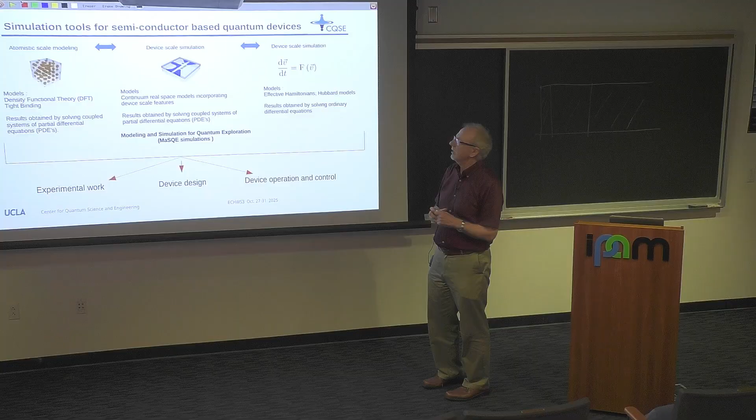And what do I mean by simulation tools? Well, I'm showing a picture which is just like everybody else's picture. You've got atoms and device scales, and then we also have device scale simulation, which actually means ODEs and things. So in these devices, there's certainly atomistic scale modeling that's needed because they're made out of semiconductors. There's device scale modeling, so what happens when you put on gates and how things work.

And then, of course, that's too complicated—if they actually want to make a device with hundreds of thousands of gates, you have to develop sort of an ODE model, basically a circuit model, which then allows people to think about control dynamics and error correction and all that kind of stuff you need to do to make a quantum device work.

Now, we don't do all of that—we only do the stuff in the middle. But we do have projects where we collaborate with people doing atomistic scale modeling to answer questions that come up when that type of modeling is needed for what goes on in the device. Similarly, we work with people who work with these effective models; we help them parameterize them based on physical quantities.

Okay, so what does a silicon quantum dot device look like? Well, basically, let me use the pointer. Turn it on. Whoa. There. That was the erase button.

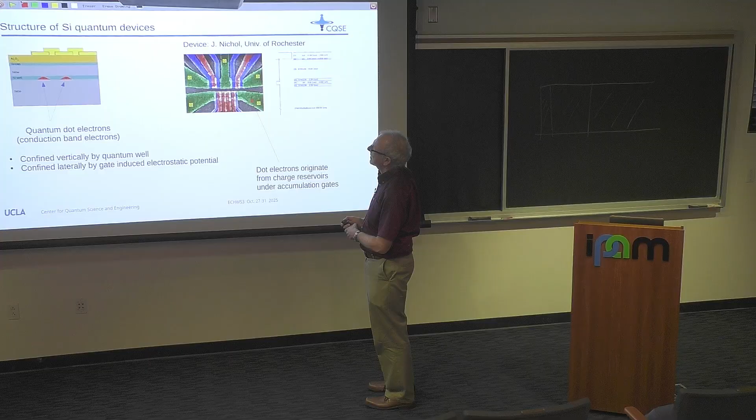Here we go. We've got a layered semiconductor material—oxide on top, some silicon oxide, a bunch of stuff, a buffer layer, and then this green bar here is strained silicon. Because it's strained, it has a particular crystal structure, and the electrons like to be there, which means it has a band shift. And down here's another buffer.

So the idea is you have this vertical structure, and there's electrons. The electrons have an affinity to be within a quantum well that's defined by this strained silicon layer. They're confined vertically, and then confined laterally by imposing potentials using gates on the surface.

So this is what a gated surface looks like. Where do the electrons come from that are going to be isolated underneath the gates to make quantum dots? They come from these reservoirs on the side, and these yellow boxes are ohmic contacts. You pump electrons in here, and they're able to flow across and occupy distinct locations in the device. Here's what the structure of the device looks like, here's the quantum well, and this is where they sit down from the top.

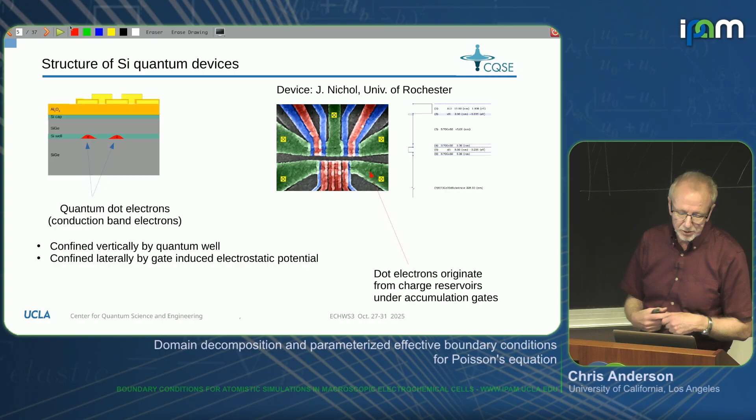So this is basically the quantum device, and the game that's played, at least that I need to play, is how do you place the gates? What kind of materials, where do you place the layers, in such a way that you can actually capture isolated electrons inside the device? And moreover, can you modulate the gate biases to introduce certain types of electronic interaction between those isolated dots so that you could get a hold of a subspace of electronic states, electronic structure states, so that you could store quantum information and do quantum operations.

What are the simulation models that are used? We're using the N-particle Schrödinger's equation, but using the effective mass approximation. So this is a continuous approach - there's no resolving of atomic features. I should call it implicit metal, I guess, which means it's metal with a dielectric constant.

These things are very cold, so they're operated at a few millikelvin. So basically things are frozen in.

What does this mean for the electronic structure calculations to do? Because we're using the envelope function, it doesn't resolve the atomic scale fluctuations - it's basically the envelope of them. Typical sizes, if you have gates about 40 nanometers, a single electron wave function's maximal size is about 40 nanometers, typically a lot less, 10 to 20 nanometers. But of course, atomic spacing is about half a nanometer. So we're solving Schrödinger's equation, but we're not resolving the atomic scale features.

Here's just a picture of lots of dots, and here's the charge density. These are the electrons that have been trapped. There's more electrons down here. This forms what are called sensing dots. Okay, so that's the simulation model.

And just to say that there's some reality behind this - there's a code called MaSQE MDMM, which is our core simulation code. MDMM stands for multi-domain, multi-models. And we use domain decomposition quite heavily, not only in the vertical direction, as I'll talk about, but also in the lateral direction.

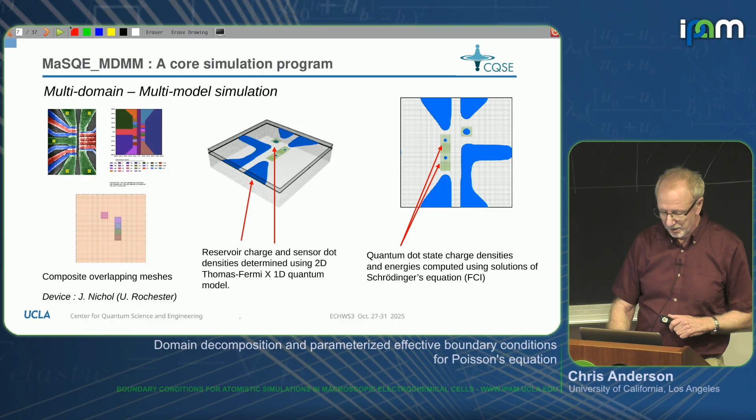Okay, so now I'm going to leave this - this is sort of the context where we're doing things. I want to get along to what's related to what's going on here. So what is the computational workflow? Well, it's what you'd expect.

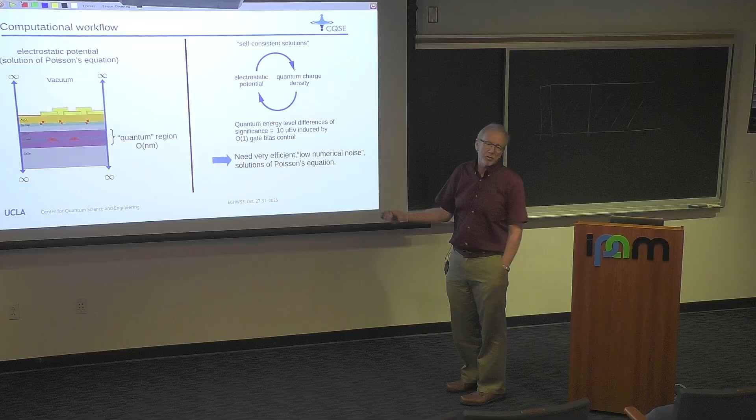You have an electrostatic potential in the device, and you have to compute it. You have the quantum region, and then you solve Schrödinger's equation. You figure out what the charge is, and then you repeat, so you just create self-consistent solutions. This is the typical self-consistent Schrödinger-Poisson calculation, although we're introducing different models for the way we actually do the population.

We actually use full FCI in the dots, and then this other Thomas-Fermi type approach for the outside. One of the challenges of this task is that the energy level differences of significance are about 10 microeV. That's because we're very cold, and we're interested in the difference between ground and excited states of these things, and they're very close together. So it's not 1 kcal per mole, it's a lot less. It's 10 microeV by order of 1 gate bias.

So the idea is you want to wiggle these things a little bit and cause the exchange energy between the dots to change. So what's needed here in terms of just the potential calculation is something that's very efficient, and in particular, low numerical noise. This is very important, because any sort of noise that's introduced by an iterative process or whatever contaminates the energy level things that you're trying to observe.

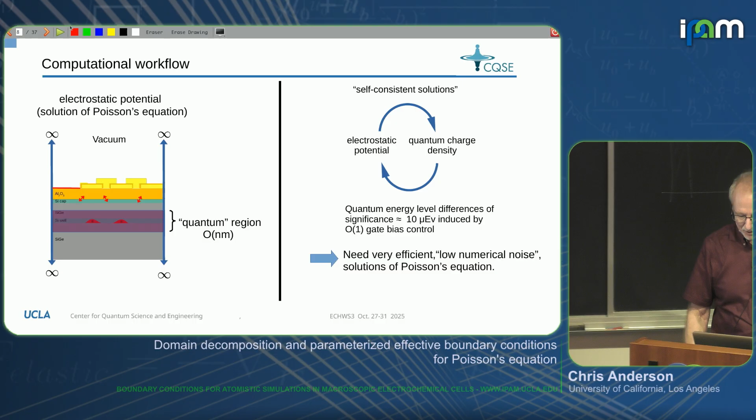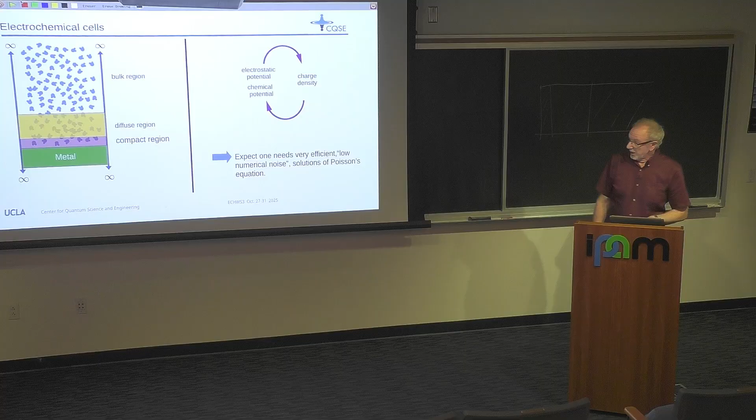And what do you have? How do you do the simulation? Well, you have to do electrostatics, chemical potentials. There's an additional wrinkle - you have much more complicated physics, at least to me. And then you get charge density, and there is this overall self-consistency loop between the things. Very simplified, but it does point out that you do need electrostatic potentials. It's part of the component. So in some sense, domain decomposition, you want to do different things, and somehow it should apply.

So what is the challenge with the kind of devices that we work on? Well, that particular code I mentioned, MaSQE MDMM, is optimized for applying gate biases just on a planar surface, because that's simple. And if you don't really care about gate structure, just what is the potential they induce, that's fine. Moreover, it reduces to doing calculations in a box, and you can do calculations in a box very fast with fast Fourier transforms. So we have a very fast solver for that.

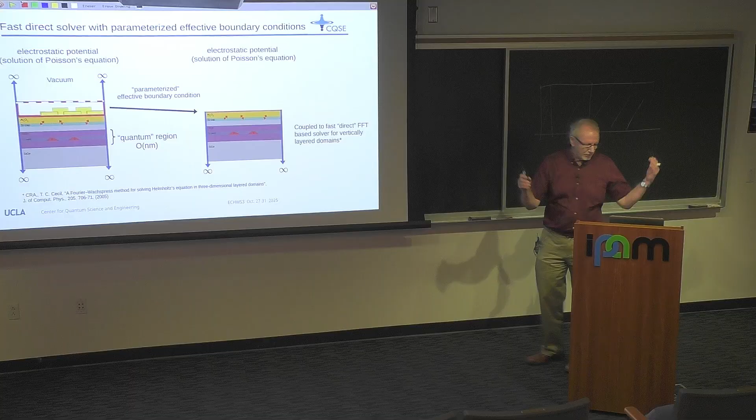Trouble is, people come along and say, well, actually, now we want to understand what the effect of those gates is. That's a problem, because first of all, when you start doing three-dimensional gate geometry with bizarre dielectric coefficients or who knows what, you then are talking about finite element solutions in 3D, and it just takes a while to solve 3D electrostatics problems with complicated geometry.

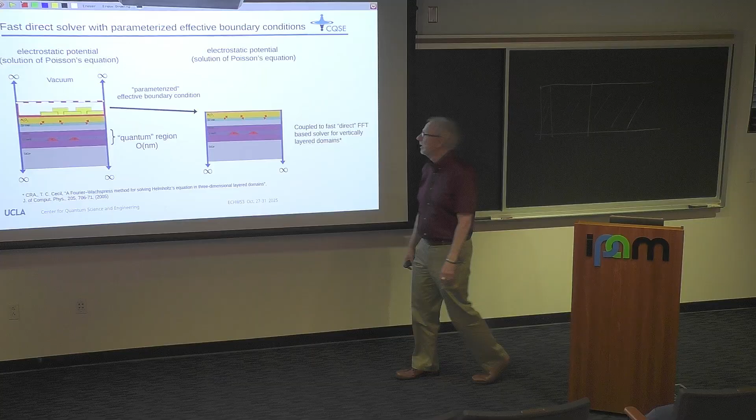So the concept is what you would like is to replace that whole complicated region by a planar surface, some sort of boundary condition, which you can then just couple to the fast Poisson solver that goes on down here. Now, it has to be parameterized because whatever you put there, there's a dependency of the solution down here on the gate biases. That's why they work. So somehow you have to incorporate into your interface boundary condition, parametrically, what the gate biases are.

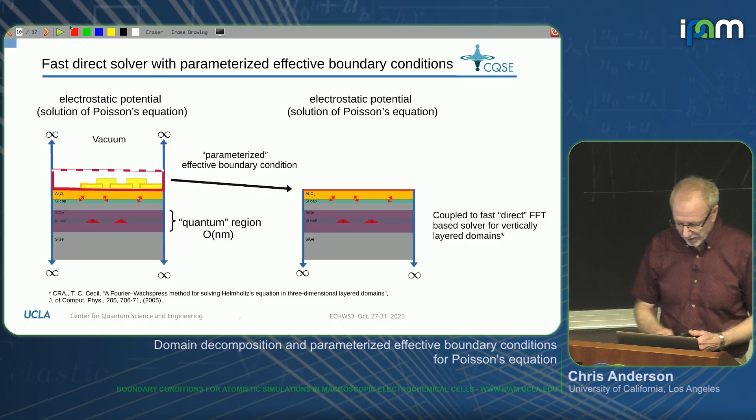So now what I want to delve into is how do you derive that boundary condition? Okay, so here's the story. You have two regions, and you want to do some work and come up with parameterized effective boundary conditions. So the way I'm going to do it is go through the lens of domain decomposition, sort of the classical stuff. So now I'm going to do a little background in domain decomposition for Poisson's equation.

If you went to a talk that a numerical analyst gave about domain decomposition, they basically show you this sequence of pictures, at least in the beginning. First of all, they'd explain what is the idea behind domain decomposition? Well, let's think about Poisson's equation. I've got a region, and I break it up into two pieces, and I have a solver for each region. I can solve it, say, quickly in each region for whatever reason. And the game is, how can I use solvers in each of these regions, combine them to get the solver of the whole domain? That's the question that domain decomposition, from a numerical viewpoint, answers.

Okay, so there's an observation that's made, and it's pretty straightforward, which is that if you happen to know the solution on the interface, then you're done, because for Poisson's equation, it's completely determined by the right-hand side and the boundary values. So if I know the values here along the red, given those values, I can solve it in A and solve it in B, and if these are the true solution values, then they will match up, and I will get the solution over the whole domain. Right.

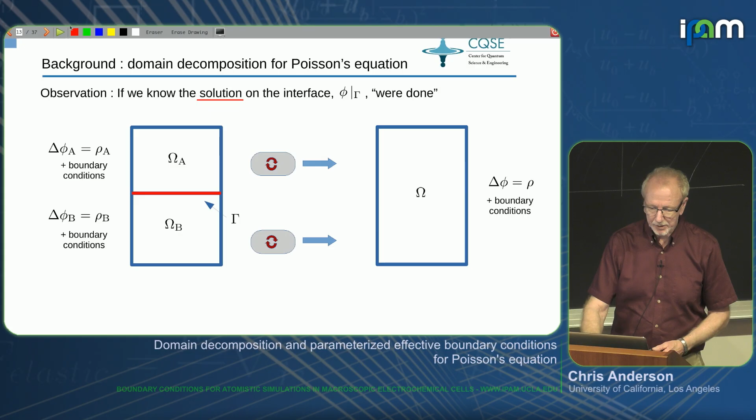Okay, so what's classic domain decomposition? I alluded to this historical way that people have been using this technique, and they've used it on Poisson's equation. In fact, it was started by Schwarz in 1870, nice paper in German, talking about how to do this process. It's kind of amazing. But if you go out on the web, you'll see that they all have this pattern: I have these two solvers. How do I combine the solution?

They say, well, do something in A for a while, and then evaluate the boundary values, and then solve it in B for a while, and then get the boundary values, and then do A. So there's this iterative process where you're consecutively applying one and then the other operator. And ideally in the limit, when you do this alternating thing, that's why it's called alternating, you end up with the values on the interface, and then you can fill in both sides.

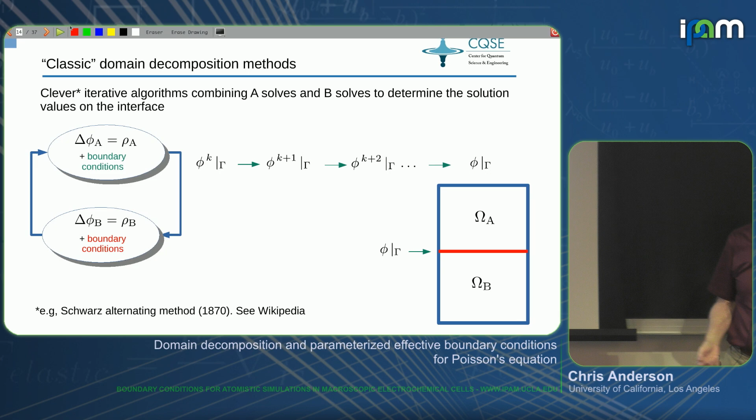And this is an interesting idea, so math people got a hold of it, and linear algebra people got a hold of it, and what have they been thinking about? Well, first of all, what governs the convergence of this process? Or given that it is convergent, how could you accelerate it? Once you have a technique, how do you make it go faster? How do you prove it works? It doesn't always work. You have to choose different things.

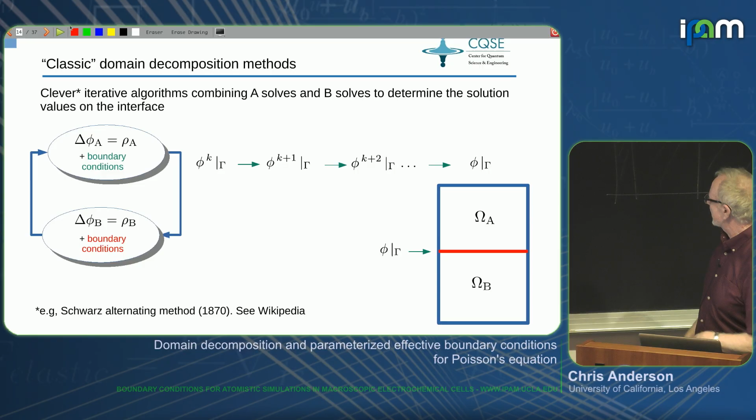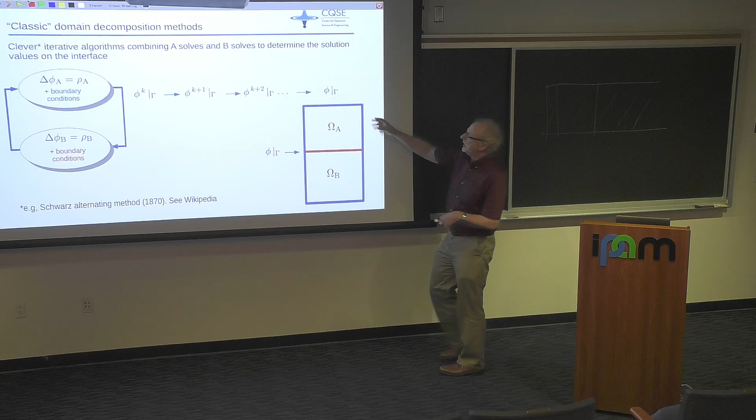Here I've had a simple case with two blocks, but what happens if I break up the domain into 64 8x8 blocks? How do you make all that work? So you'll see these kind of papers. Now the thing is, that doesn't really help us, because the whole idea is that you don't want to have to solve them over and over again. That gets too expensive. So this self-consistency that you use in classical domain decomposition doesn't work for us.

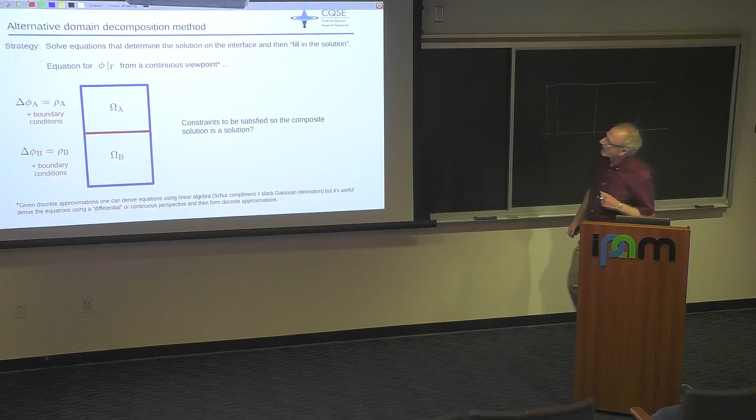So there's another way to do it, which has already been discovered, but from a PDE viewpoint. The idea is that if the solution on the interface determines the solution, fine, just write an equation for the interfacial values and then solve it. So do that first, and then solve on either side. So to get started here, you have to have an equation. So how do you get the equation?

I'm going to talk about obtaining the equation through a quote-unquote derivation from a continuous viewpoint, and this is important so we can use analytical models if we want. But there is a way to derive equations for interfacial values between these two regions from a linear algebra viewpoint. If you have a complete discretization over the whole domain, and you isolate the unknowns along the interface and structure your matrix appropriately, you can find equations for the interface that you solve first, and then you solve the equations on either side. That set of equations is known as the Schur complement.

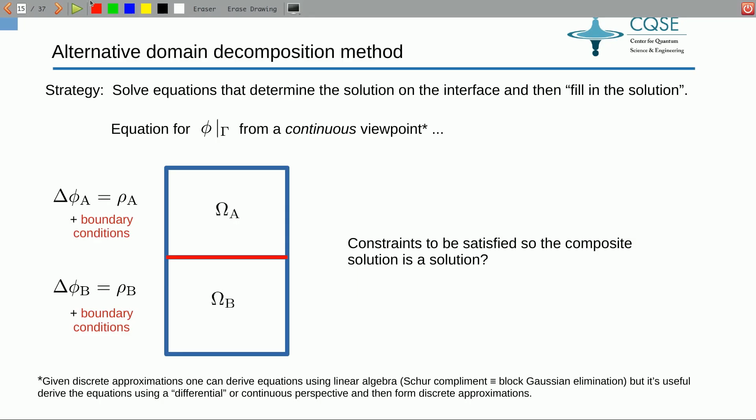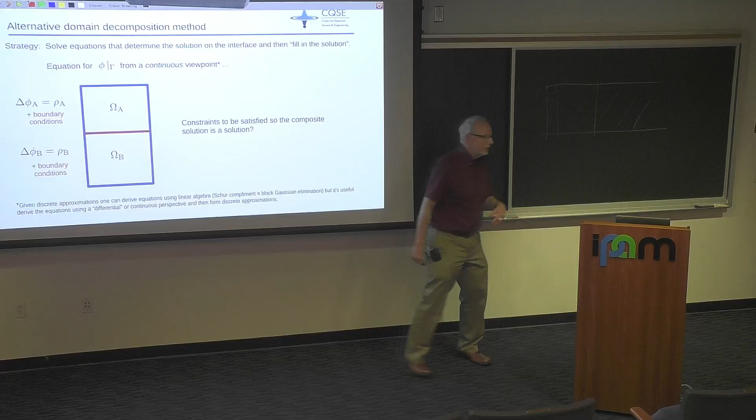Now, you don't even have to be fancy linear algebra. Usually when I teach it, I just say, you're just doing block Gaussian elimination. Gaussian elimination says, do something to get down to the corner, and then you work your way backwards. So this is block Gaussian elimination, but instead of numbers, you're using matrices. Same idea works. So if you have a discretization, you can write down the equation for this first and then combine them. Now, this isn't too useful for us because we don't want to start with a discretization. We want to start with just a generic model. So when you're deriving equations, you say, well, what has to be satisfied?

So physically, what has to be satisfied is you need continuity across the interface. You need that whatever you put here, you're going to use the same value when you're solving this as when you're solving that equation. So that's continuity across the interface. And then the other thing, this nice thing about elliptic problems, is that it's sufficient to get a whole solution to also just include that you have continuity of the normal derivatives.

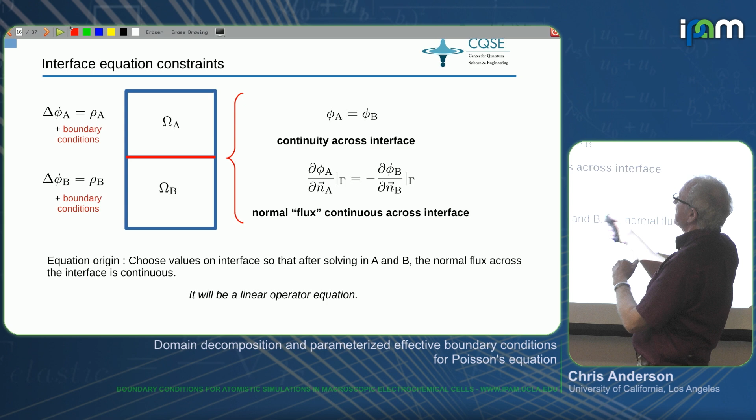Okay, so there's a minus sign here because I'm assuming one normal derivative. I'm just picking one direction. I want the jump in the flux across the interface to be equal to 0. Okay, so how do you get the equation? You just think about it. You say, okay, fine, I'm going to develop the model which says take any values on the interface and then figure out the operator that maps it to the fluxes and then set the flux on either side equal to 0. So that's the way you derive the equations. It's just a flux balance equation.

So sort of semi-formally, here I have the flux balance equation, and in words, the flux in solution A due to the boundary values, the right-hand side, and the boundary values that are not on the interface has to equal the flux down here on the B side, around the edges, and in the middle, or introducing some notation, and by linearity, you can express it this way. So there's a linear operator that says take the values on the boundary, figure out the self-induced flux there, and then you've got some flux due to the right-hand side, and the forcing has to equal the self-induced flux on the B side, down here, and then the flux that way. Okay, so you can do this sort of formally.

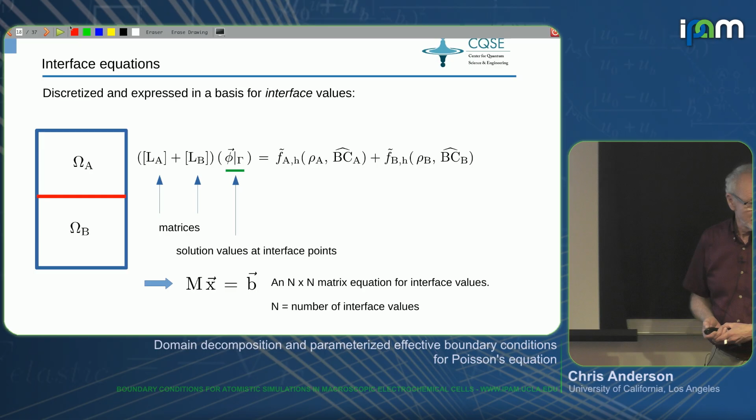And the nice thing is that these are linear operators, which means that if you pick a basis for the values on the interface, they're matrices. Okay, so you can set up a matrix equation, Mx equals b, and you can construct this in advance. You can find LA and LB, and then you've got the right-hand side, which depends on fluxes. Okay. So how do you use these? Well, you have your system, you pre-compute the entries in these matrices, and you also parameterize the right-hand side forcing that's due to the A part.

So this works for us because we have some collection of gates. When you push on one gate, keeping all the others 0, you can figure out how much flux it induces. And so that generates a vector. And then you do that for all of them, and it's a linear problem. So in some sense, the flux induced by this collection of gate biases can be expressed as a sum over individual vectors of values on the interface. Okay, so you can pre-compute these things. This just depends only on the structure.

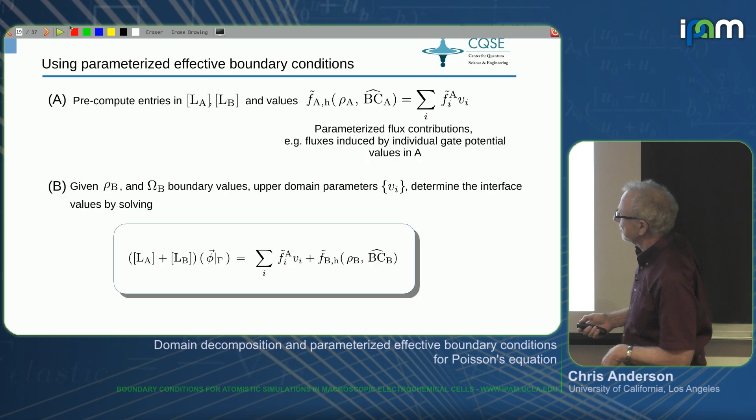And then given the density and boundary values and the upper domain parameters, suppose you want to actually solve a problem where you're doing stuff down below, you basically determine the interface values by solving this equation. Okay, so you use pre-computed information, and it kind of goes like this. The steps are, 1, you have to compute the flux that's due to the stuff down below. Well, that's a B solve. You just have to solve it down there, evaluate the normal derivatives, that gives you the flux. You then have to accumulate the forcing due to the top. Well, that's just the linear combination of stuff you've pre-computed. And then you have to solve a matrix equation, but the entries of the matrix have been pre-computed, so you just have to solve it. And then once you have the boundary values, you can just solve on the bottom.

So why go to all this trouble? Because the thing to note is that if you're only interested in the solution in the bottom, you don't have to do any solves up top. You're encoding all the information about the electrostatic interaction of the top with the bottom through this equation and the matrix coefficients in L sub A. Okay, so that's basically the strategy.

How does this work out in silicon-based quantum devices? Well, okay, so we have a situation where we've got complicated geometry up top, or, turns out, you can also have an upper domain which is infinite. You can glue on an infinite domain block, figure out the Dirichlet-Neumann map, that's this map of boundary values, analytically, actually. It's diagonalized by the Fourier transform, or actually Fourier series.

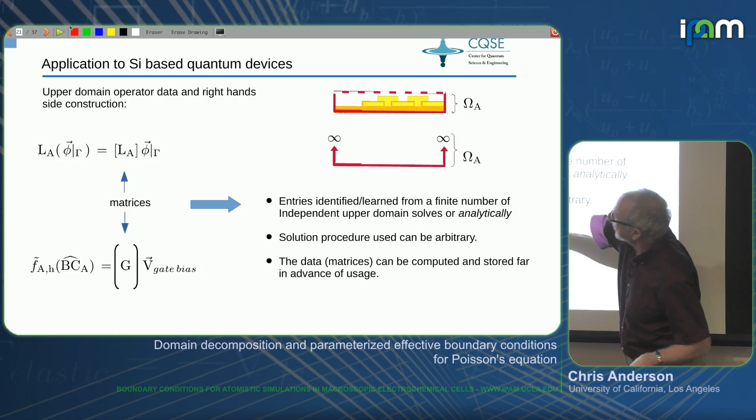So given these things, you can calculate those operators. So you either do it, because they're linear, you can just send through a basis and get them column by column, or as I said, you could do it analytically. You can also just calculate the forcing that's due to gate biases and things by just putting in unit gate biases and then evaluating the flux they induce. And then given these values, you can set up equations and solve it down below, like I said.

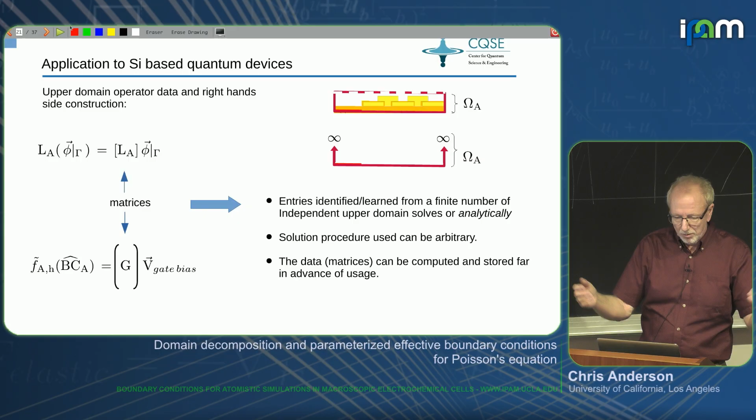Now, before I give an example of this, there's an interesting thing you can do with the data you collect in these operators, is that if you sort of collect data on both sides for these things, you can then combine three of them. This is just an offline calculation separately done. You can then combine them to a single boundary condition. And I mentioned this one, you can connect things to the infinite. This is just not working well.

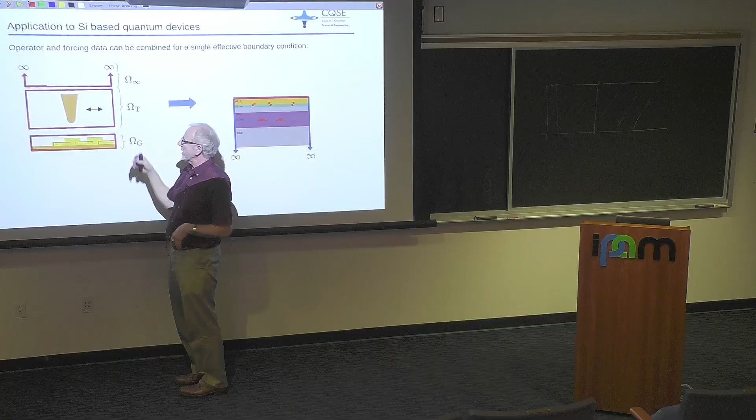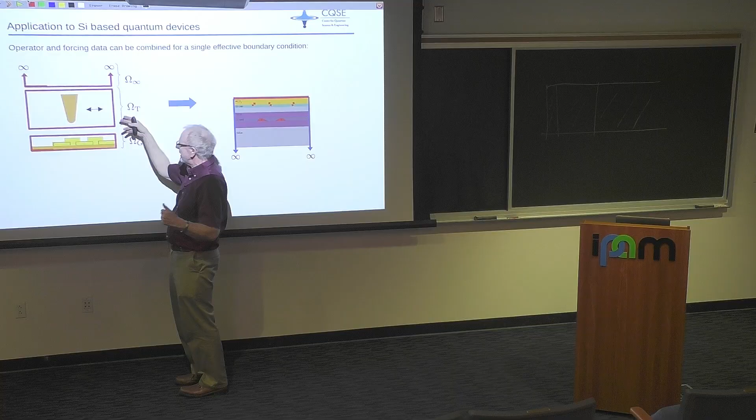The infinite case, now what's going on here, this is a representation of a STM tip, and this arrow means that you can actually parameterize its motion. Now, the way that the parameterized motion of this tip was done was not to regrid it every time you moved it, but to create the map, the data that you need for the Dirichlet-to-Neumann map, to construct the boundary condition. And because if it's in a periodic domain, you can just multiply phase factors. So you can move this data instead of moving the tip, and that should be quite useful. Okay, and then you can glue on the gate biases.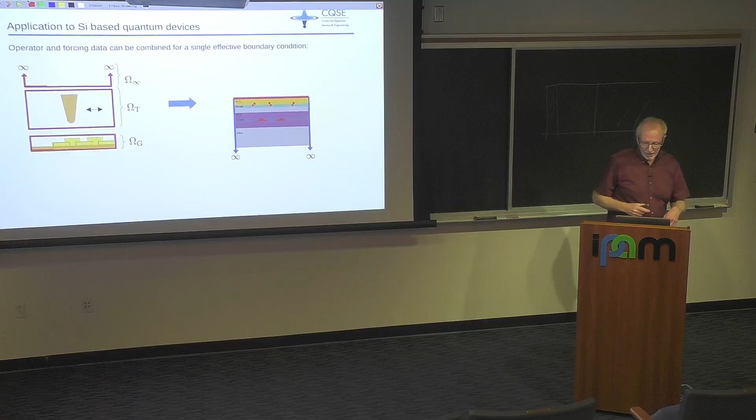Now, why did I show you this picture? Because this is how we did this problem. And this is sort of the demonstration of what it's good for and some of its properties. So I work with experimentalists, and STM tips, as Stefan was already working with, you can use them for interesting things. They were using it for something non-interesting. They're just using it as a source of potential.

So let's just put a potential, and then they actually have a way of putting in a tank circuit and detecting things. So they're using this tip as a moving gate, which they can do some, I guess, reflectometry, who knows what, but they're able to actually sense things. And so they had this great idea that maybe we could use it to basically interrogate what the structure is of the quantum well as felt by an electron that might form a quantum dot.

Okay, so one of the difficulties in these devices is that things don't always work. They get weird noise sources and stuff varies as it moves around or depending on where they pattern the gates. And you'd like to be able to know what's causing it. And so you'd like some way of interrogating what's going on in that quantum well. And they have been slicing it and doing X-rays and who knows what to figure this stuff out. But the trouble is, you've got to hit the right place.

Okay, so it would be really neat if you could just have some way of figuring out what's going on inside this quantum well. And not at the atomic scale, there's not enough resolution. These things are very big compared to atomic scale sensing, so it's not a way of doing atomic scale resolution, but what you can tell is what would be the influence of atomic structure on a dot. So the thing you really want to know is how does atomic structure influence what goes on here? So for instance, what happens when you have a step, or alloy disorder or various other things.

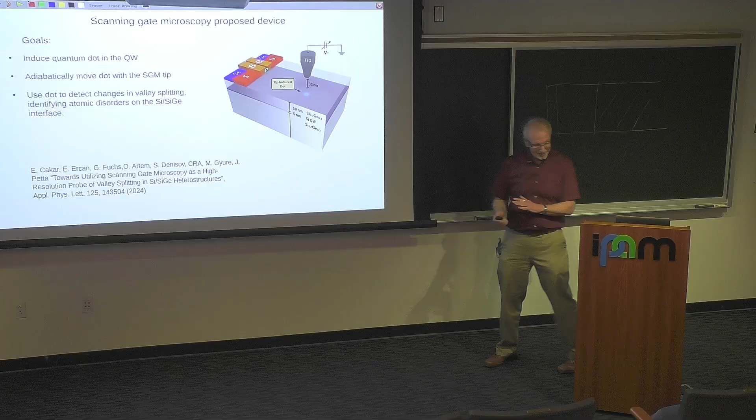Okay, so this is the idea, and so this was coded up using these pieces of a model for the tip and the gates, and then it was moved around. And the results are written up. I think the operative word is towards, because they did this and they're like, okay, we've got to change the design. I mean, it's actually hard to build these things. Okay, but the reason we got involved is because before they spent a lot of time trying to actually make this thing happen, there are some fundamental questions that have to be asked.

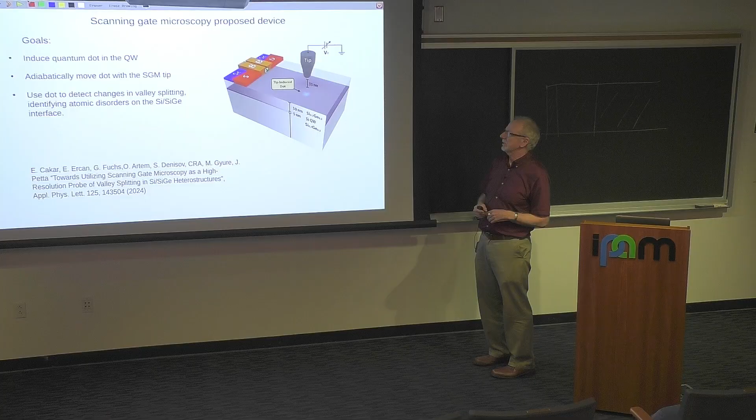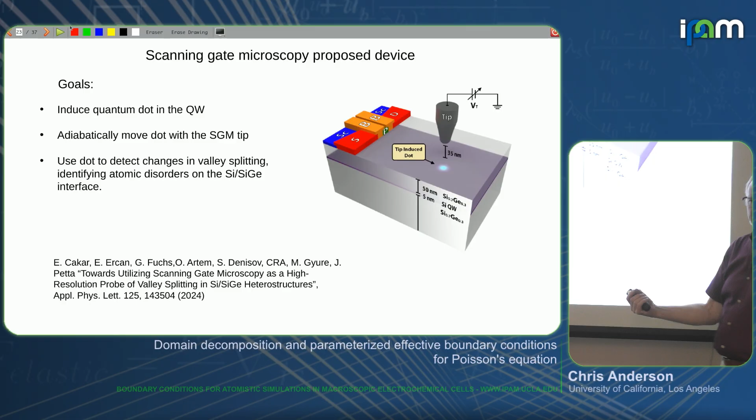In fact, the first one I asked was, how do you know you can get a single electron here? These things are hard. I mean, the point is that you've got a reservoir over here, and yeah, it's easy to pull out a bunch of charge, but you want to pull out just one. Is it even possible to do that? Do you have enough control? And secondly, even after you have it out here and you start dragging it across, can you do it adiabatically? That sounds to be a challenge, because this potential that the electron sees is not uniform by any means.

It's kind of crazy because it's shaped by the potentials on the gates. Okay, so what are the results? Yes, you can get a single electron, but it requires sort of thinking hard about how to do the gate biasing and the tip biasing depending on where the electron is.

So in the first case, you bias things so you have a reservoir, that's that red underneath the part, you get basically a dot, Jason calls them tweezers, and then you turn off all the reservoirs, you force the stuff to go out to the sides, then you have to move it away from the dot. Now, it looks like nothing's really changing, but it is changing because if you don't bias the tip appropriately, it'll basically want to go back under the gates.

So this is one of the problems, you have sort of reverse tunneling you have to worry about at this level. And what you're seeing down below are the biases of the varying gates, et cetera. And you have to do a little bit more, and then finally you can get it out into the open, ungated surface. And then what you're seeing here is how you have to bias the tip to drag it adiabatically across the surface, basically out in this direction. And you're modulating a tip that's about 26 volts, which seems to be not unreasonable for what they were thinking about. Okay, so this is useful.

Why did we have to go to the trouble of using these boundary conditions? Well, when this thing moves, you really want to avoid having to regrid everything. This would have been a real pain in the neck, because this is geometry moving relative to each other. And what's nice about the effective boundary conditions is that this tip was a block where I could translate it analytically and then create new boundary conditions that reflected the fact that I moved it.

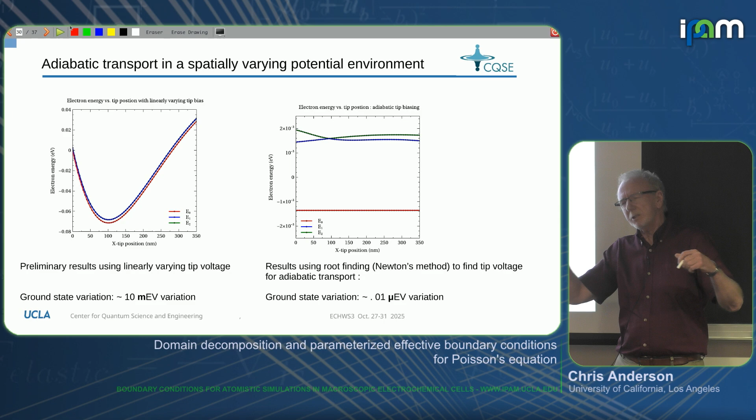Okay, so how good is it? Well, one measure is, let's see if we can bias things to get adiabatic translation. And the first thing you try is, well, maybe it doesn't really matter. So you kind of look at the potential and say, okay, fine, it's sort of going up, so maybe I should keep on pushing down. So you just choose a linear voltage change as you move from point A to point B, where you increase the potential. And so this is what it looks like.

And what you're seeing here is the ground state and the first two excited states. And it goes Fermi level 0. Unfortunately, it kind of goes down and then goes up again. I think the way I figured out the linear thing was I said, okay, at 250, I want it also to be 0, so I'll just figure out the line of the potential that basically would compensate that. And you see, well, this doesn't work too well.

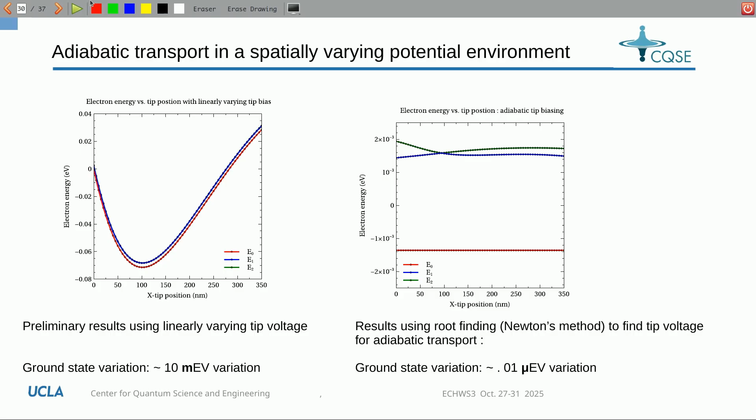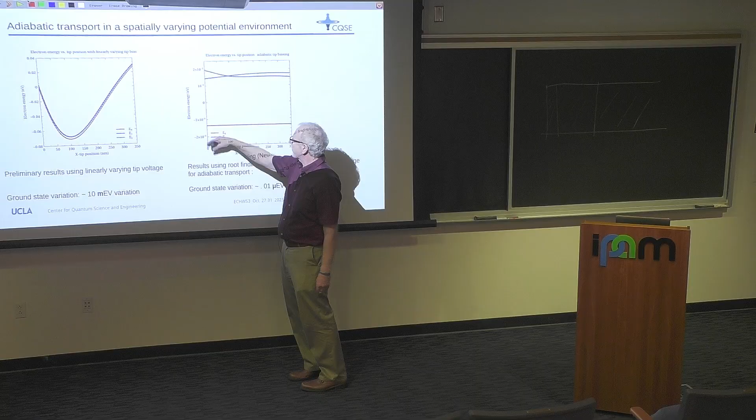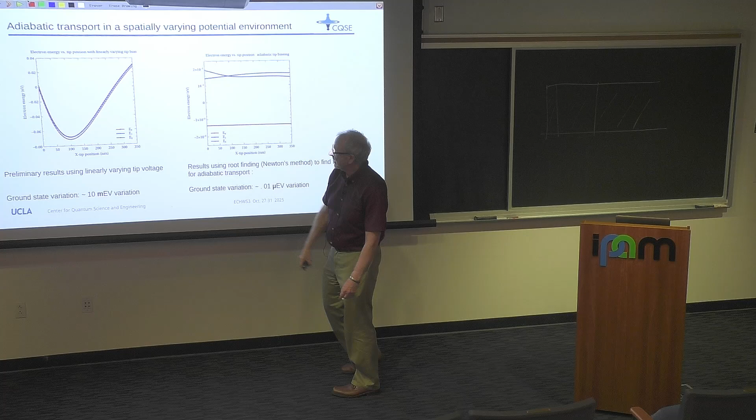Okay, so then how am I going to figure out those potential values? Well, you can hook this up to a root finder. And for every position, you can say, how should I bias the tip to get basically an energy that's 1.5 or 1.47 millielectron volts below Fermi level, and then you move it across. So this is what the electron energies look like as you go across. And then instead of a 10 millielectron volt variation, you can get 0.01 micro eV.

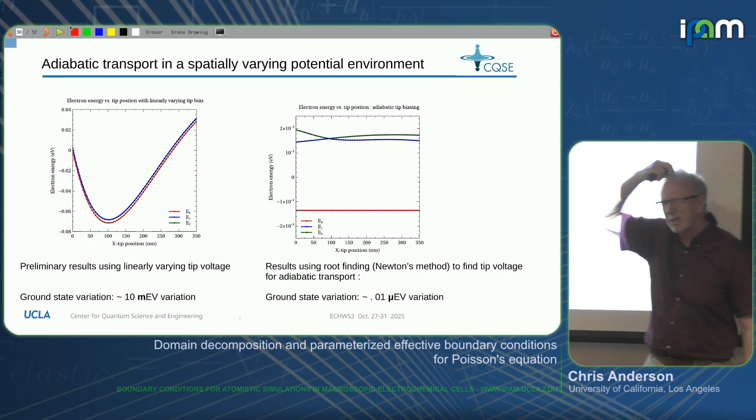Now you may think, well, why do you really need this small variation as you go across? Because maybe you're looking for a signal, which is variations about that, a smooth signal. That's true. On the other hand, this turned out to be a nice demonstration of the accuracy which is possible with the simulation, because here we actually are able to capture an avoided crossing, which is really difficult to see here, but it's actually here. And you may wonder, is this a bug in the code? Why is it that when you're dragging it across, you see this?

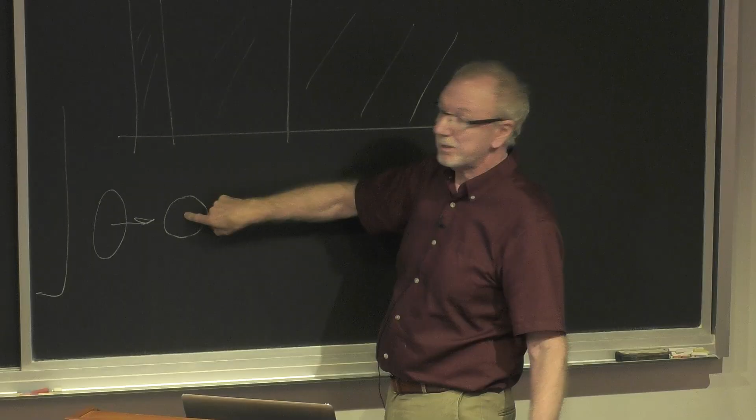And it has to do with the fact that the dot is slightly elliptical when it's near the gates, and as you go this way, it becomes circular. So there's a degeneracy, and then it becomes slightly ellipsoidal in the other direction. And so this transition in the second and third excited states, if you count 0 as the first one, that's this avoided crossing that's happening. And it's able to resolve that. And you may think, well, who cares?

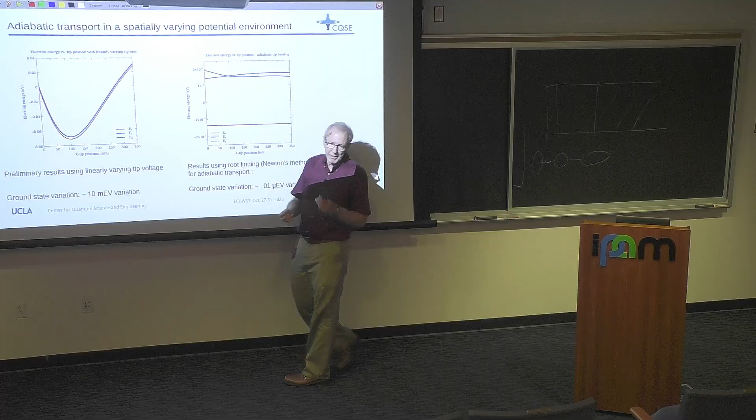Well, they care, because it turns out these kind of energy avoided crossings are important for quantum mechanical operation, because if you have to worry about singlet-triplet splitting, that's very small. Okay, so this was not only a demonstration that you can create a way of computing the potentials that's very nice in terms of being able to move stuff around, shuttle dots around, but it has a requisite accuracy.

Okay, so let me just point out some useful features of these type of boundary conditions. Can I ask a quick question? Yep. So these avoided crossings, are they using that also because these are stable points and they can do things like clock transitions? Is that in your team?

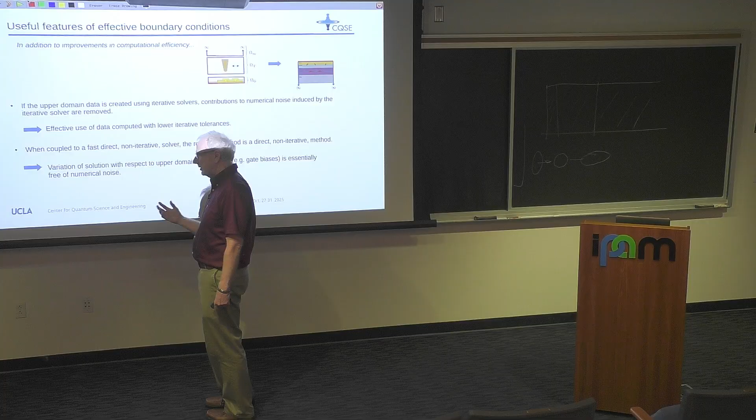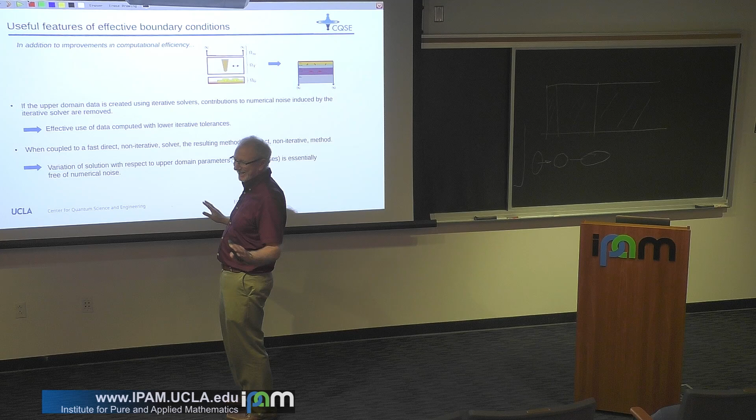This is becoming important as they actually try to shuttle electrons from one place to the other. And what you want to make sure is that states don't get contaminated. So if you had an excited state for some reason and you're dragging it across, it's going to mess things up. I mean, that's my understanding. Okay, so how they actually incorporate it, I don't know. I mean, there are people.

So what this does, it means that it would allow you actually to think about how you should bias gates in such a way that as you move it, you keep a separation between those two excited states. In general, you try to keep as much separation as possible between all the states. Okay. And this is just an... Using transitions between those states, maybe coupled to some electromagnetic pulses or so.

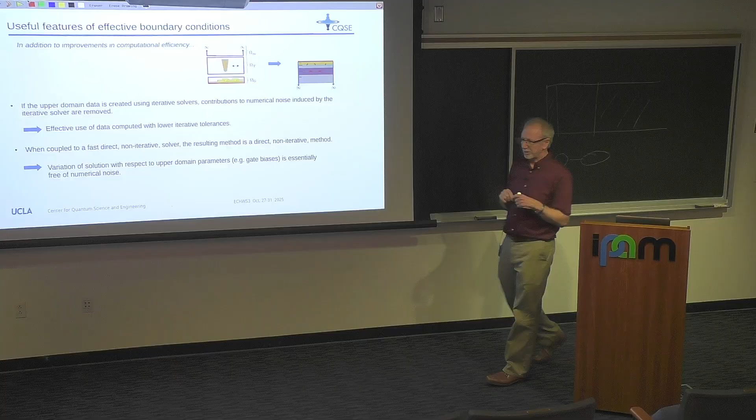Right. Okay. So sort of a numerical perspective. This is a cool thing and got some results for a problem you don't even care about. That's fine. But I want to point out there are some nice features of this. First of all, there's some computational efficiency because we can use the solver down below. But there's kind of a neat thing going on here, which isn't completely described here.

For example, what's going on here is some complicated electrostatic stuff happening because of this. And all of that goes away and is encapsulated into a single boundary condition. And that's kind of a neat thing. And actually, this is exploited here, because suppose I did an iterative solver to get the data. It can be noisy.

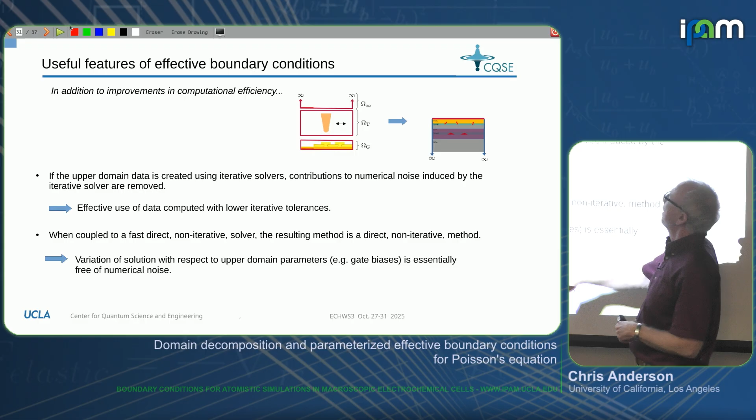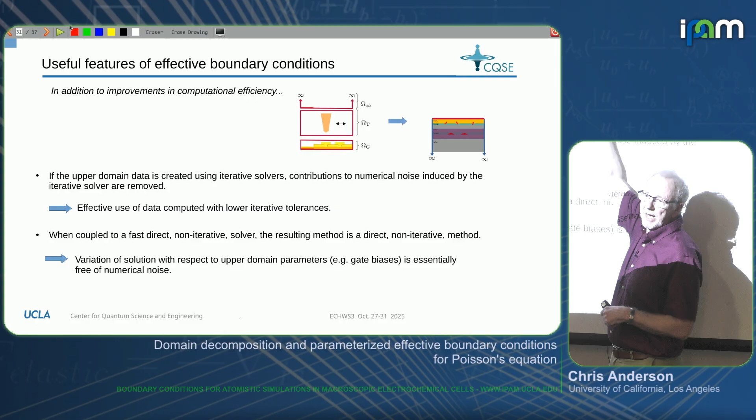That's fine. What's going to happen is that some of the coefficients aren't going to be particularly accurate. But when you use that data inside the simulation, all that noise is gone. I may have the wrong values, but they aren't going to fluctuate with what goes on up here. So encapsulating the effect of this inside this boundary condition reduces noise. Or, as I'll explain in a minute, if this has true noise, you're going to get an accurate representation that hopefully isn't contaminated by the numerical stuff.

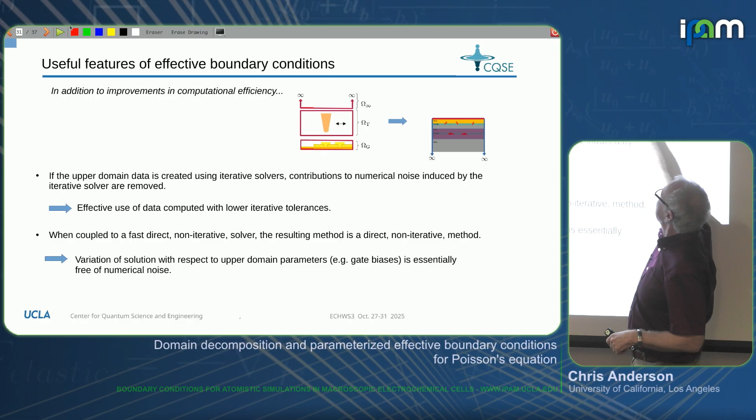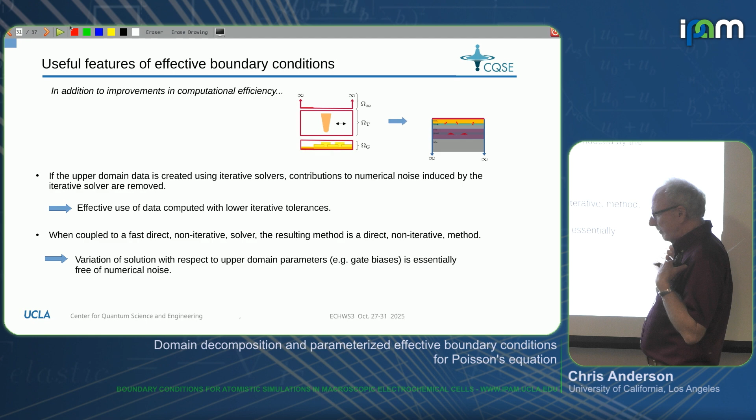Okay, and then, as mentioned, when you couple this thing, you end up getting a fast direct solver, which means the variation of what's going on here with respect to all the parameters, the gate biases, et cetera, is extremely smooth. If you've ever done numerical work with iterative processes, we have to go to 10 to the minus 10 in precision in the energy level, so the potential calculation has to be very accurate. Turns out that goes away.

If you have a direct solve, you just do it and you get machine precision, so you get a few more digits. Okay, so this turns out to be incredibly useful for that type of simulation, and other things when you're trying to muck around with these quantum states. Okay.

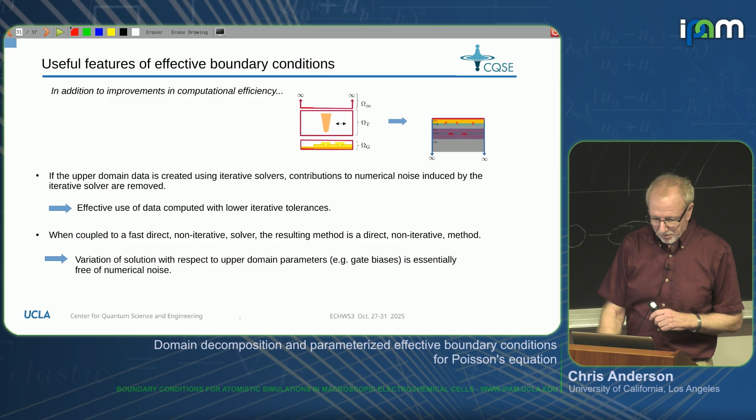Right, so how does this possibly apply to what we're doing here? These thoughts came about because I was thinking about, well, I'm going to talk about this stuff.

Somebody can ask, well, who cares for what we're doing? So thinking about, okay, how does this interact with what we're doing? There's kind of a neat thing going on here: in the way of deriving these boundary conditions, it doesn't matter what you do in this region. You can have any process you want that's mucking around with the potential, any distribution, the charge density, as long as it's an electrostatic interaction, that goes away because all you need to know is what its normal flux is that it induces.

Okay, so you could have polarized things, solvated things, multiple things, it doesn't matter. All that will get washed out in what goes on down here. The data you get down here will be different, but the differences basically get washed out. And then the idea is down here, if you're doing something realistic, this is where you still do the computation. You still have to do things down here, but the coupling here is determined here.

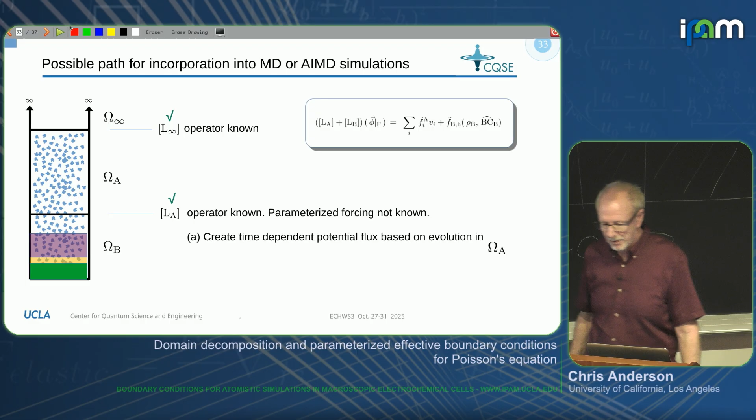So how might this work? Well, you use an effective boundary condition. So if I were doing it, here's the equation. What you have to do to use this is, first of all, you'll need to compute the flux. The implementation is a little different than most people think. They think, oh, an effective boundary condition, I just do something here and solve down here.

No, there's a two-step process. You have to do something here to get the contribution to the boundary condition - that's this part. And then you have to figure out parametrically what the contribution to the top is. And then you have to solve an equation to get the boundary values.

So it turns out in this case, these operators are known. They're diagonalized by the discrete Fourier series. You can actually figure out what these operators are, diagonal in a Fourier basis. So in some sense, this part is trivial. This part is what it is when you use whatever method down below to calculate the charge density and figure out its electrostatic potential. And then there's this part, okay?

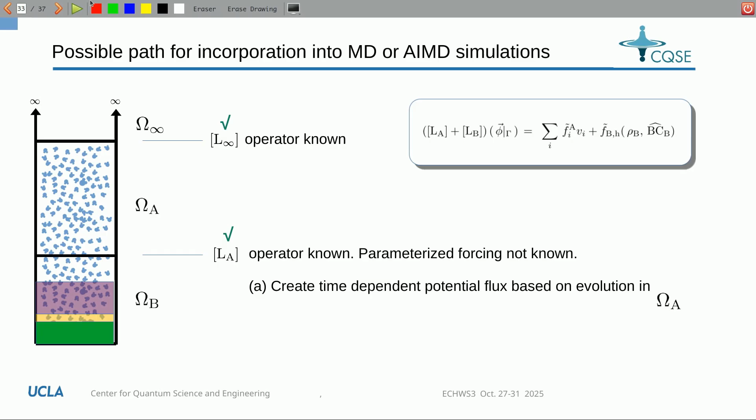Well, if you give me a simulation, I can basically collect this function as the time evolves. That doesn't sort of help though in doing time evolution. So the point is, there is a way to gather the information you need to put here to use the boundary condition so everything works out from PDE theory, okay? So that's done.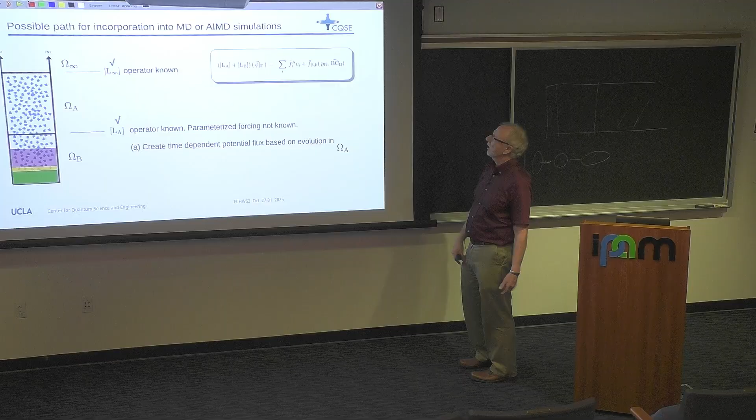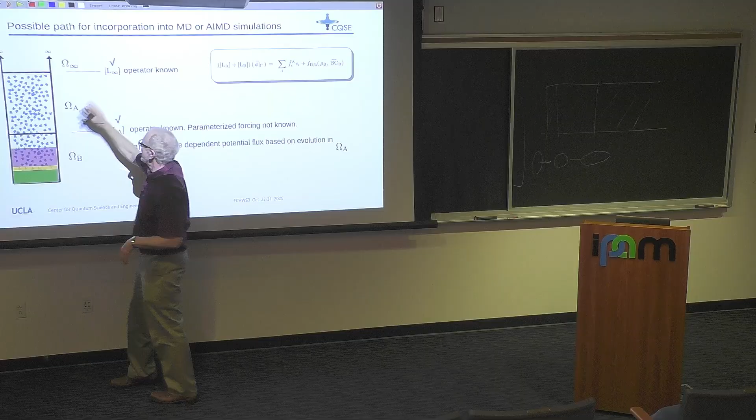And yesterday afternoon, I sort of put things together and said, oh yeah, okay. And by the way, I should say that when you figure out the values that get put up here, the constant term is what you would do based on what you already talked about, higher order corrections. The thing is you can basically create corrections to all Fourier modes. So basically everything done down here, that part's good. But the hard part here - so the utility of this approach is that you can extend that accuracy.

I was stumped here. I said, fine, so what? Can I ask something? Yeah, sure. I mean, that boundary between omega B and omega A...

I mean, should be in a region where, let's say, the bulk conditions for omega A are reached, so that the exchange can happen, and then you can measure the stationary flux in or out of the quantity, or it can be even before that is reached.

Well, okay, so you can put it wherever you want. The influence on the accuracy will be changed. So I should say it's not the flux of the material - this is the potential flux, so it's the normal derivative, okay?

In one second, I'll say the answer. So the answer is, how do you do this? And so there's complications, okay?

So fortunately, I ran this by Stefan, and he said, oh yeah, I know how to use this information to create a stochastic boundary condition that you would use here that preserves statistics. Ooh, it's got a tingly, right? There's this interesting thing that, oh, this is what he thinks about.

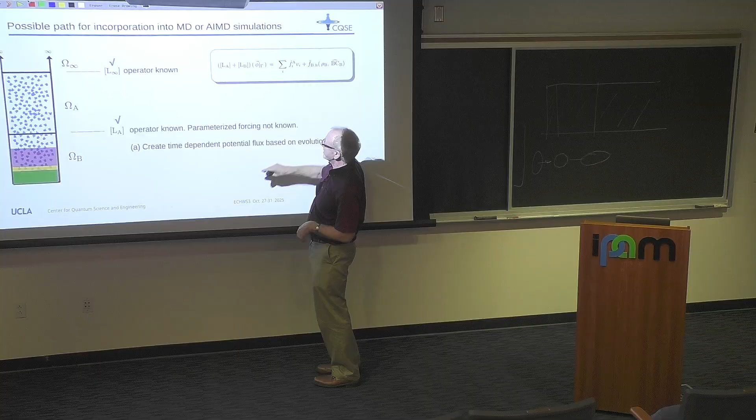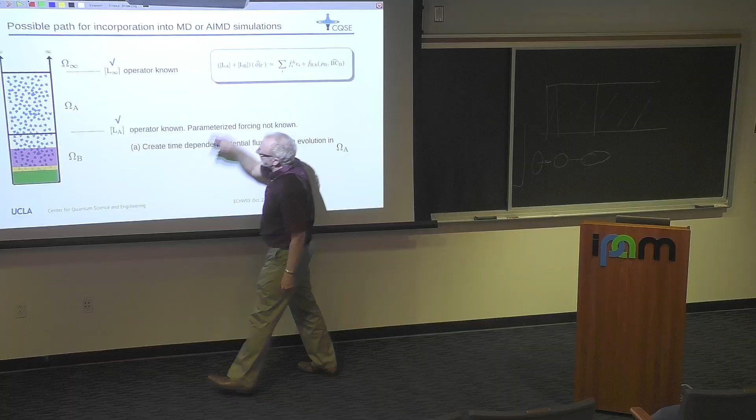This is really cool. Okay, so he has a way of figuring out what to put here based on the information you gather here, say over some epoch, so that this way of doing the boundary conditions, you would solve down here, get this, put in the stochastic forcing, solve this equation, get phi A, and then recompute. Then you have a model. Okay, I don't know if it worked.

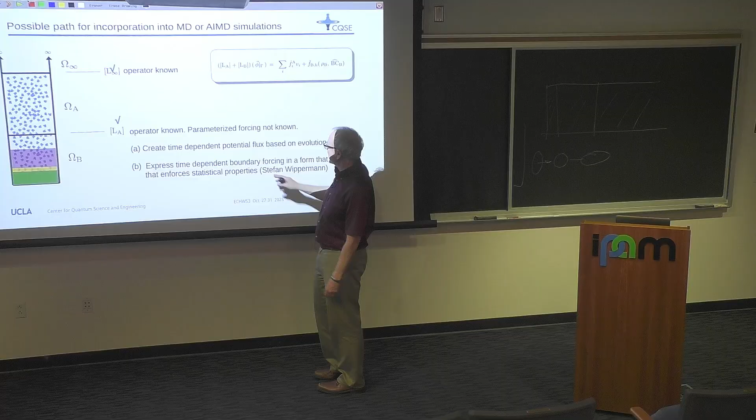He had to run off because he has to go back to Germany. But he has a way of expressing the time-dependent boundary forcing, which you can evaluate by doing some experiments, in a format that then enforces statistical properties.

I think this is really cool, because this is what's really hard about trying to use this approach for problems with actual stochastic forcing. That's why the recent work by your team is really neat, because I have no clue how to do that.

Now there's this question about actually using it. What's going to happen? I'll have a boundary condition here, I'll be moving things around. You're going to have to worry about what the flux is across, right? How are you going to do that? My intuition is, don't worry about it initially, see how bad it is.

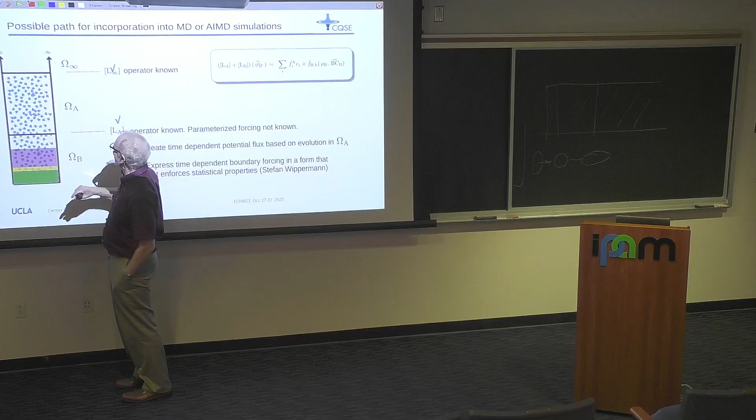Stefan was worried. But there is the fact that when you use these boundary conditions, most of the electric field is going to keep the stuff away. There will be some small number that wants to cross. So my attitude is, fine, just reflect them.

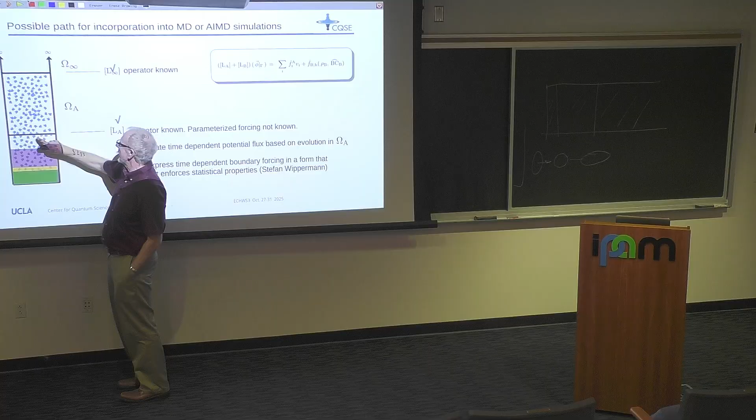Stefan says in LAMMPS, for example, you can also do a soft boundary. So that might be the way to do it. Wherever you put it, you're going to make an error because you cannot necessarily confine the things going on in here from crossing the barrier. But I would argue the actual flux will be really small, because the force on these particles will be much more accurately calculated since I'm using the whole thing.

Does that answer your question? Yeah, of course I have other questions, but we can discuss that. Okay, so... what? Oh, good.

So that's basically it. There are two ways I could think of making this insight known. First, I want to emphasize what I find interesting here - even if I'm just doing flow in a box with infinite boundary conditions, this is a way of gluing on infinite boundary conditions, which extends what your work does.

Also, I know this type of approach using domain decomposition just isn't used much - everybody's interested in overlapping things. That explains why, if people here have looked at domain decomposition, this doesn't look anything like what we do. The reason is most people doing domain decomposition don't do it this way, because they don't want to create these operators or do the work required to get this data.

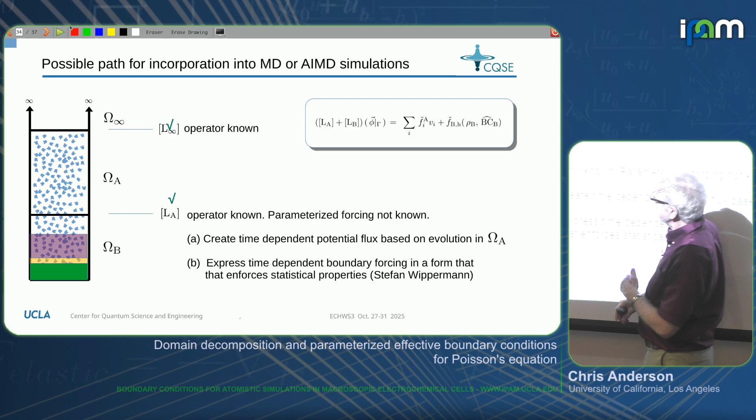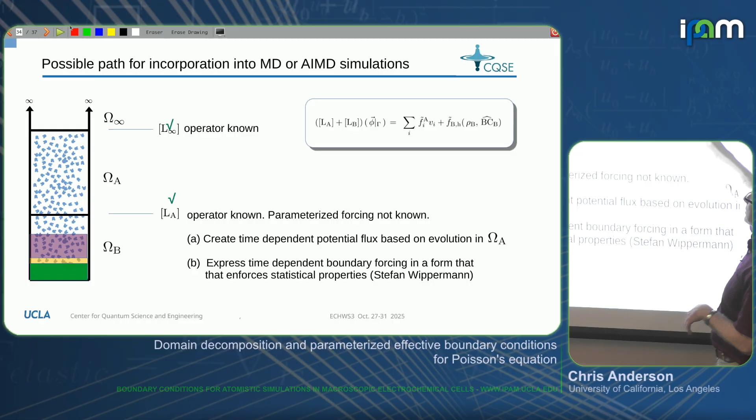So it's useful up here, and it'll be interesting to see if Stefan is right - I hope he is - that given this data, he'll be able to figure out a way to do this, in which case we're just adding extra terms to what he already has, that will hopefully improve the accuracy of the boundary conditions.

So like I said, this is just a summary. The goal is we can do this, and what are the conclusions? Even though they don't look alike at all - we're solving potential equations and doing device level simulation, representing stuff that's complicated far away - there is a similarity. I'd argue there may be ways to improve computational precision and efficiency using methods derived from domain decomposition techniques, but I should put a star because it's not the normal way.

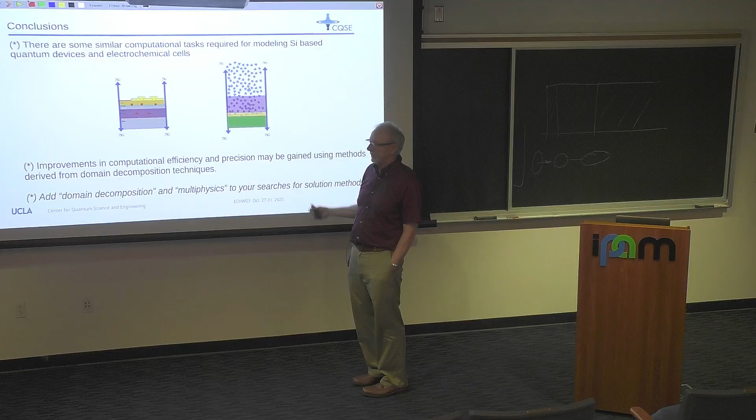On the other hand, many of you may not have looked into the literature. I shouldn't have, because I figured out what I needed to do, but it may be useful when looking for ideas about how to combine solutions. There are other ways to do things - you overlap stuff, do an iterative process, whatever. Lots of different ideas about what works and what doesn't. So add domain decomposition and multiphysics to your searches for solution methods, and you'll see tons and tons of papers.